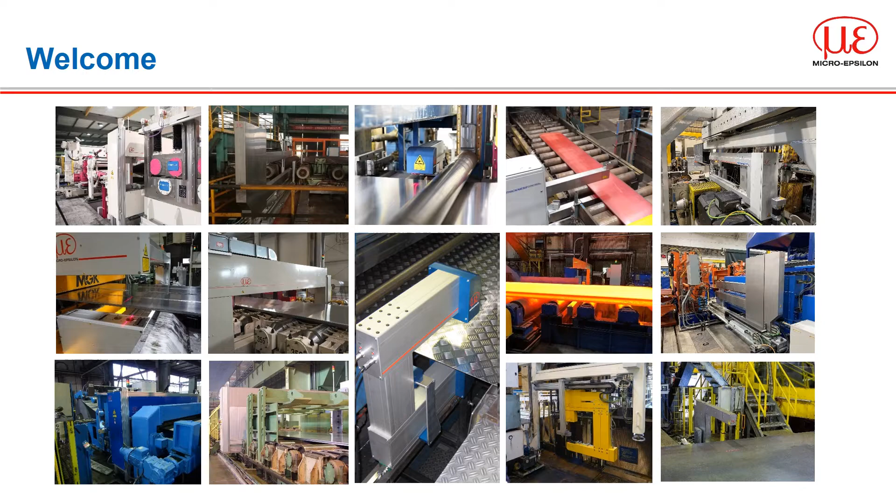My name is Glenn Wedgbrow, and I am the Business Development Manager for Micro-Epsilon here in the UK. I'll start by giving a short introduction to the company Micro-Epsilon, before posing the question: why measure thickness? And from that, we will explore the challenges to making reliable thickness measurement.

I mean, thickness measurement is easy, right? What could possibly go wrong? I'll follow up the challenges posed with solutions and applications and show you where our systems have been used.

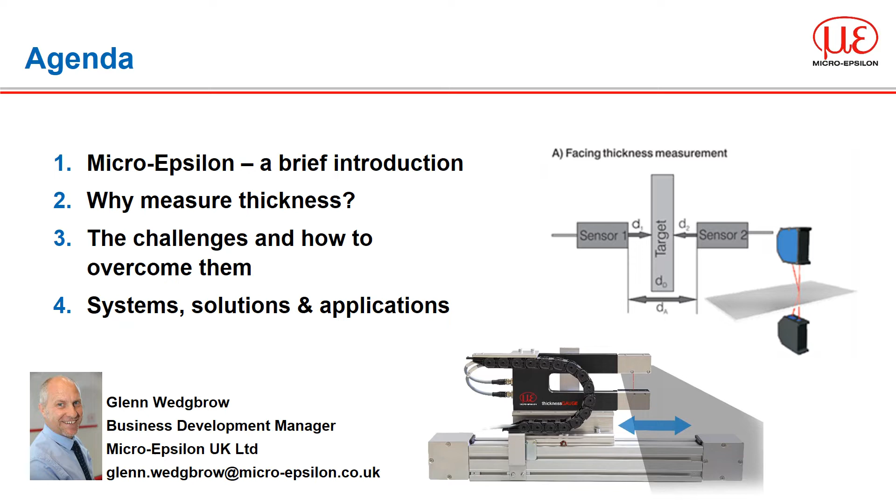So who or what is Micro-Epsilon? For the benefit of those watching for the first time, Micro-Epsilon are a German company established in 1968, originally selling American high-precision strain gauges, which is actually where the name Micro-Epsilon comes from. Around 1980, we developed our first eddy current sensing technology and then moved away from selling strain gauges and started to develop our products for displacement measurement.

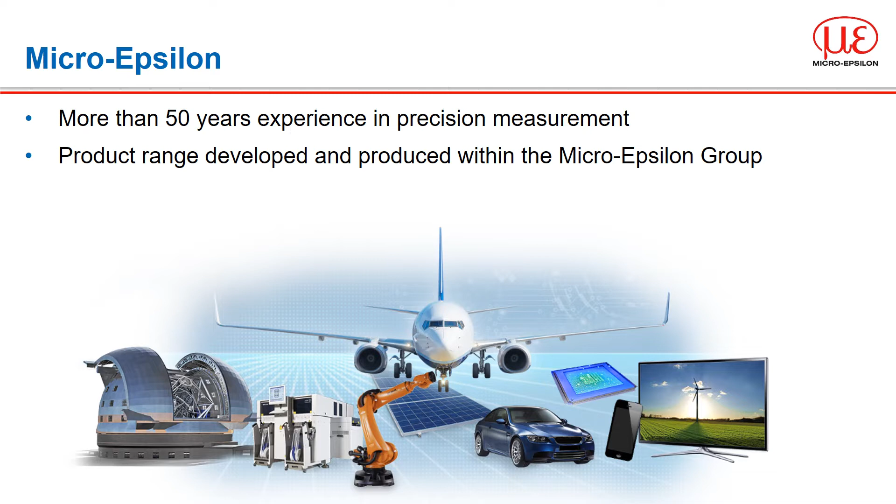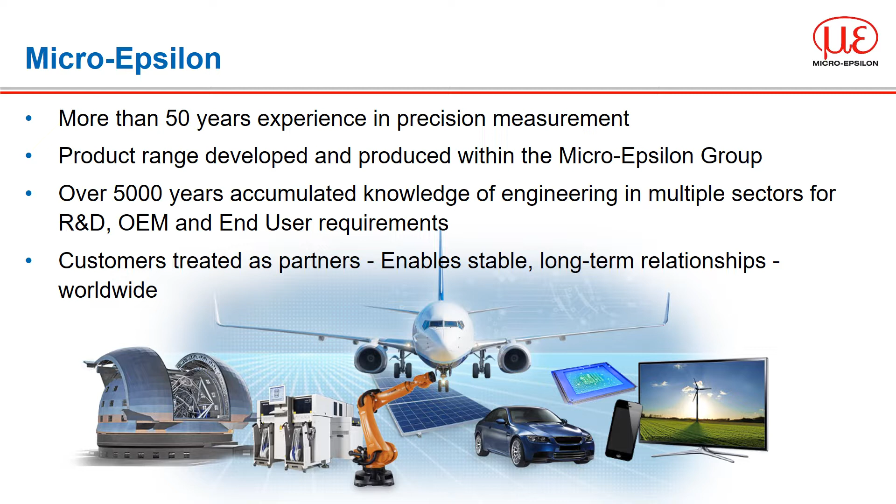From just 2 people, the company has grown to over 1,200 employees worldwide. The entire product range is developed and manufactured within the Micro-Epsilon group of companies, of which Micro-Epsilon UK is one. The organisation has been built by engineers, and combined we have more than 5,000 years of collective technical knowledge across multiple industrial sectors. One of the keys to our success is that we treat our customers as partners, working with them to ensure stable, long-term relationships worldwide.

Our current product offering falls into 3 basic categories: measurement of displacement, measurement of temperature, and inspection and measurement of colour. Across these 3 fields, we've developed and utilised technologies that allow us to measure positional changes from as small as 30 picometers and distances up to 3 kilometers. With our infrared temperature sensors, we can measure from -50 degrees C to +3000 degrees C, and for colour, we can detect changes or shades much finer than a normal human being.

We're able to offer products as catalogue one-offs to fully customised solutions in hundreds or thousands of units. Indeed, our production capability is more than 1 million products a year.

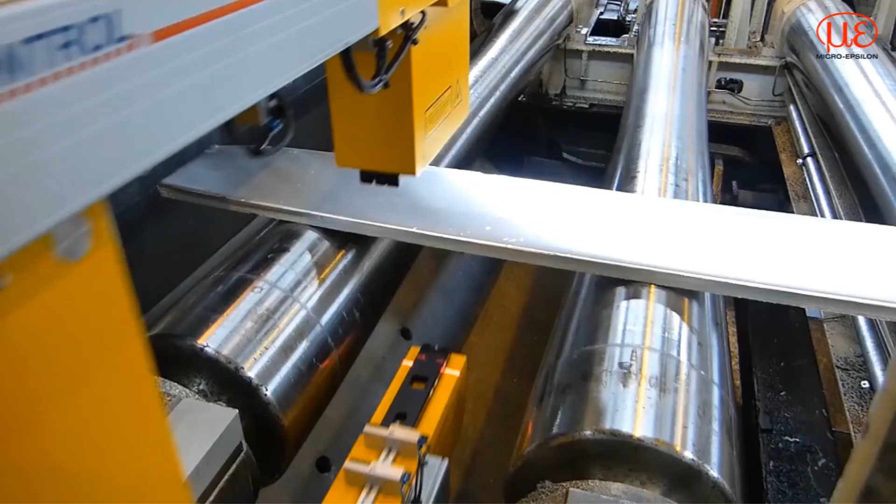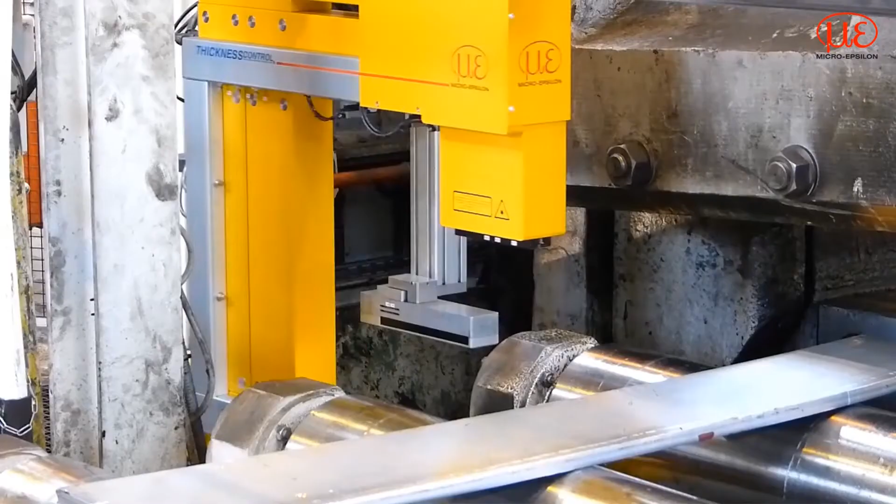So why do we want to measure thickness? There are many reasons that thickness is important. All materials have a tolerance in production. Materials produced too thin or too thick could cause a problem further down the line, or perhaps at your end customer's site. Maybe they use this material and build it into a system that then fails or doesn't fit.

Changes in thickness during production can indicate wear of components, for example in extrusion dies or on rolling stands. Monitoring trends can point to early warning signs.

The traditional method of checking thickness is often to take a measurement sample from the start of the production run and then again at the end. But what happened in the middle? Of course, if you find it out of tolerance, that's a lot of scrap to consider. So you might choose to take more readings during the process.

If that check is done manually, then that often requires the production line to stop. And anyone will tell you that most process variability will come in the start and stop phases. So keeping a line running is generally key to getting things consistent. Ultimately, checking the product thickness as it is produced ensures that the end customer receives the quality of product expected.

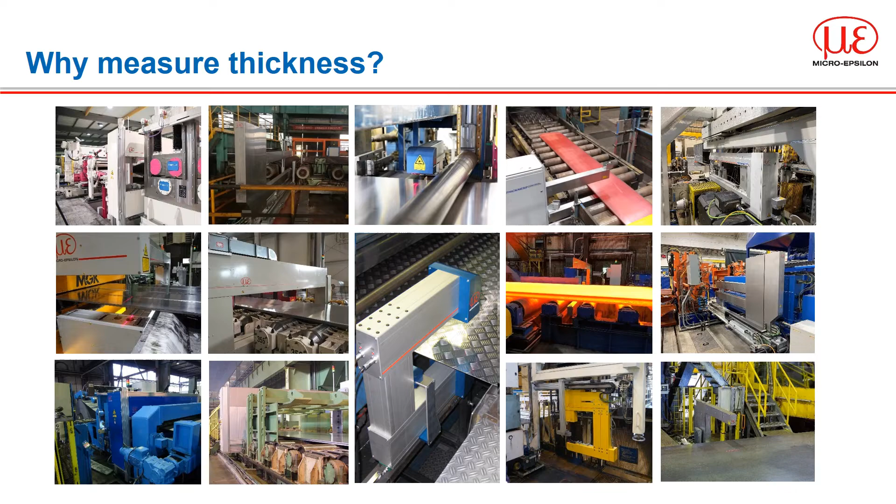Perhaps the most simplest thickness measurement is the single-sided measurement against a reference or datum surface. It seems straightforward. First, you zero or tare the sensor on the datum surface, and then insert the target to be measured. The reading of the sensor is changed or displaced by the material thickness.

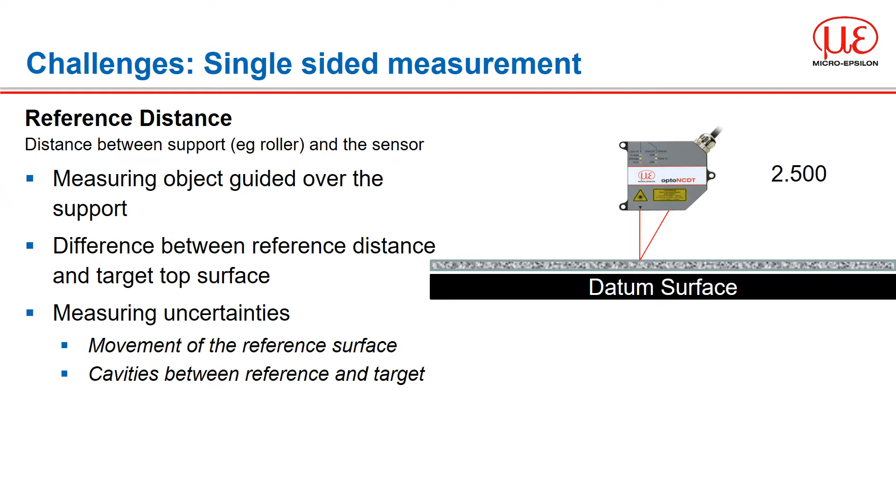However, there are a number of uncertainties with this method. If the reference or datum moves after mastering, then the reading will be incorrect. Similarly, if the target does not sit correctly on the datum surface, then the air gap is also included in the measurement. The same issue can also occur with tilted targets.

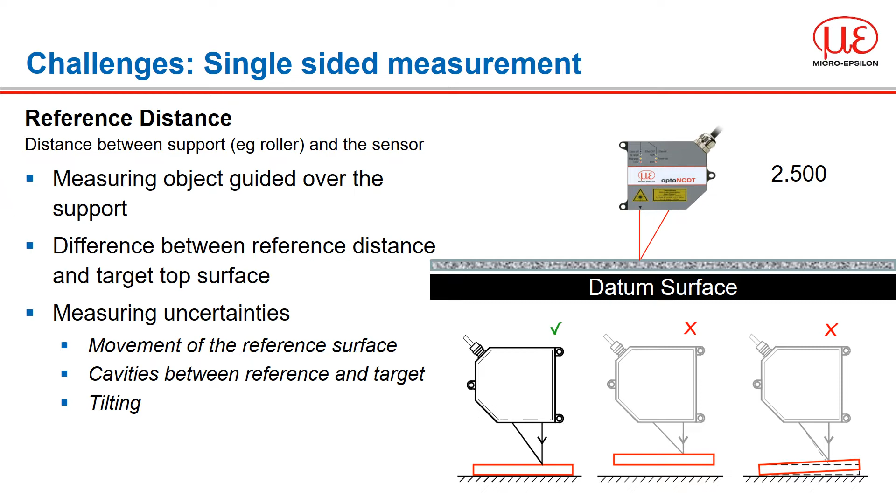If we are only allowed to view a target from one side, then we have to consider if we can combine technologies to enable accurate measurements. Where we have a mix of different material types, we can utilize those different material properties to our advantage.

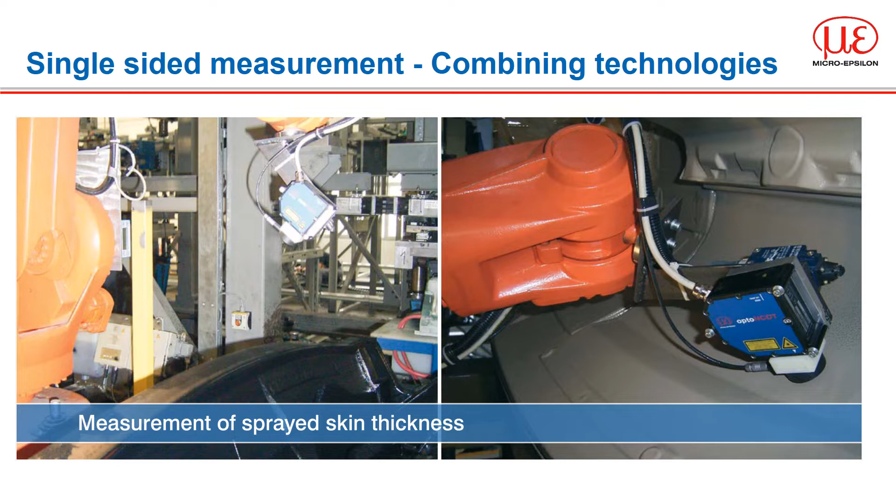For example, an eddy current sensor in combination with one of our laser triangulation sensors is used to measure sprayed skin thickness. The eddy current sensor measures the distance to the nickel-coated spray mold, which is distance A, and has an opening in the center through which the laser sensor measures the distance to the sprayed part, distance B.

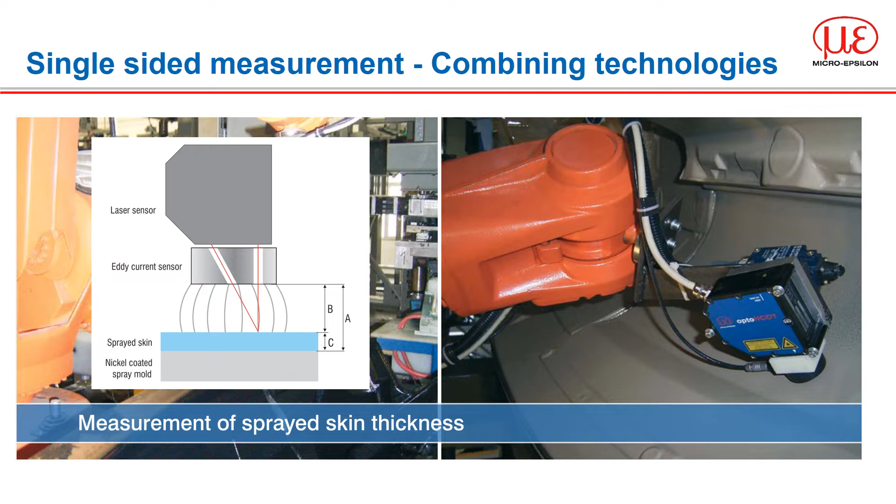Eddy current sensors only measure against metallic targets, and therefore see straight through the non-metallic spray coating. The use of the air coil in our eddy current sensors makes this combination possible, as the laser sensor can look through the eddy current sensor at the same measuring point. When both signals are subtracted, the thickness of the applied sprayed skin is measured, which is marked as C.

Or another well-used sensor combination is done with our eddy current and capacitive sensors for non-metallic materials passing over a roller. Movement of the metal roller is considered by the eddy current sensor, and the capacitive sensor measures the material or coating thickness.

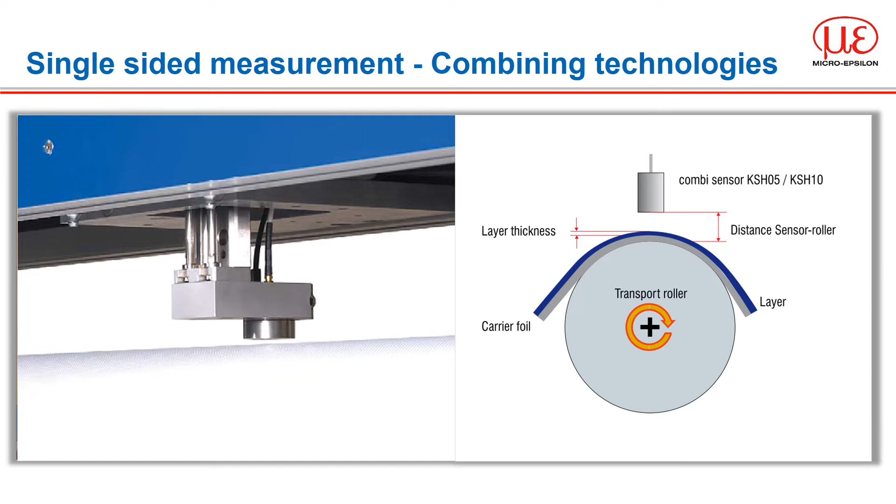If your target is transparent, you have the possibility to make a relative measurement of the material thickness from one side, using one sensor with interferometer or confocal technology. The use of light refraction creates edges or return signals that indicate the transition between air and material. Knowing the refractive index of a material will enable you to accurately measure the material thickness, provided it stays within the measurement range.

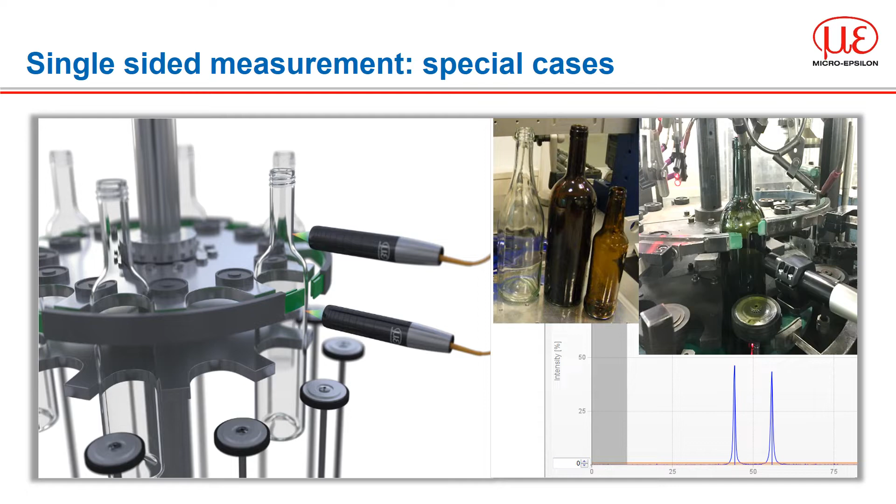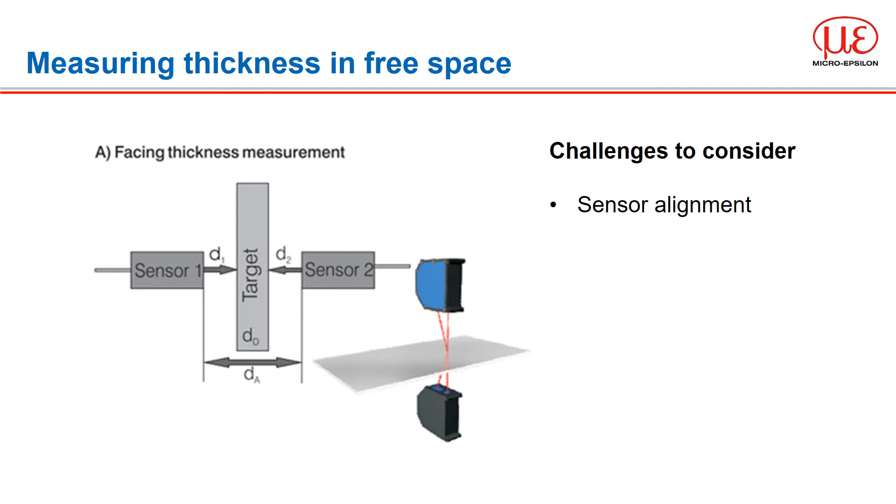Of course, if single-sided measurement is not suitable or the challenges cannot be overcome, customers will want to know the true material thickness by measuring the material in free space, which requires having space on both sides of the material so that a measurement can be taken from both surfaces. When you consider this setup, there are a number of challenges that must be considered and either overcome or accepted.

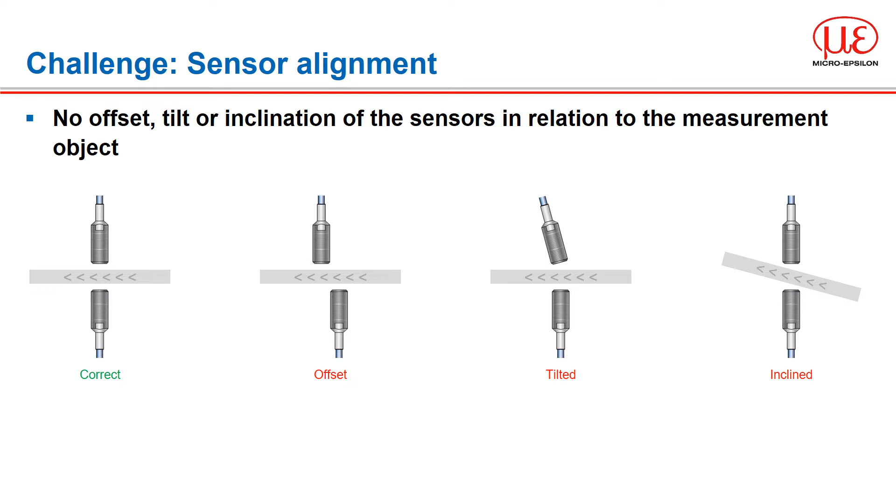The first challenge is sensor alignment. Seems fairly obvious - sensors must be positioned so that the measuring spots coincide through the full measuring range of the sensor. There should be no offset, tilt or inclination of the sensors in relation to the measurement object. For example, with a sensor offset of 1mm and inclination of 2 degrees, the effective error equals 35 micron. At 10mm target thickness, this error increases.

Particularly with laser triangulation sensors, you should also take note of the beam spot location relative to the sensor housing. You should not necessarily assume that two apparently identical sensors will position the spot in the same place. Standard sensor housings are not usually precise enough for precision thickness measurement unless time is taken to align them correctly. For example, here there is a 160 micron variation in position of the spot from housing to housing.

To aid customers making their own thickness setups, the new ILD 1900 laser triangulation sensor uses an innovative sleeve mounting arrangement to tighten the spot spacing from housing to housing. So here the spread is less than 20 micron from one sensor to another.

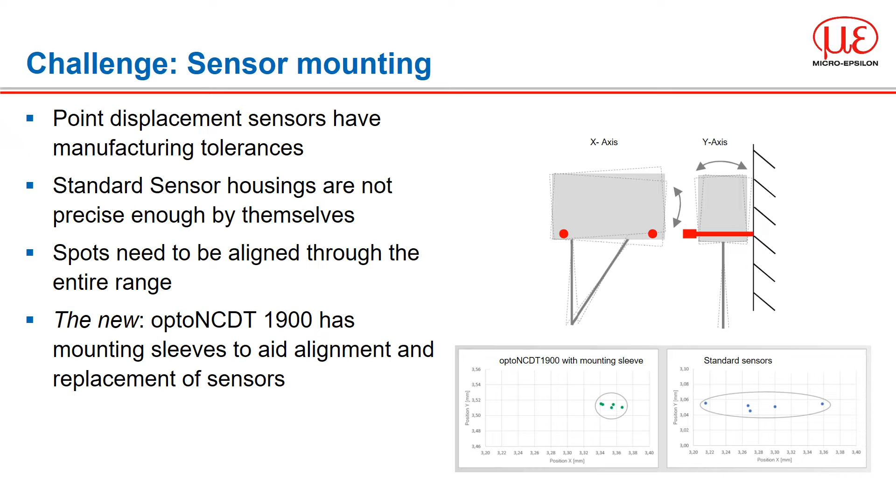When you have two sensors looking at the same target, you must consider that each sensor has its own cycle time. If your target is vibrating or moving in the gap between the sensors, it's very easy to introduce an error. Consider a target oscillating up and down by 1mm at 20Hz, 20 times a second. A difference in capture time of just 1 millisecond between your sensors would equate to an error of 125 micron.

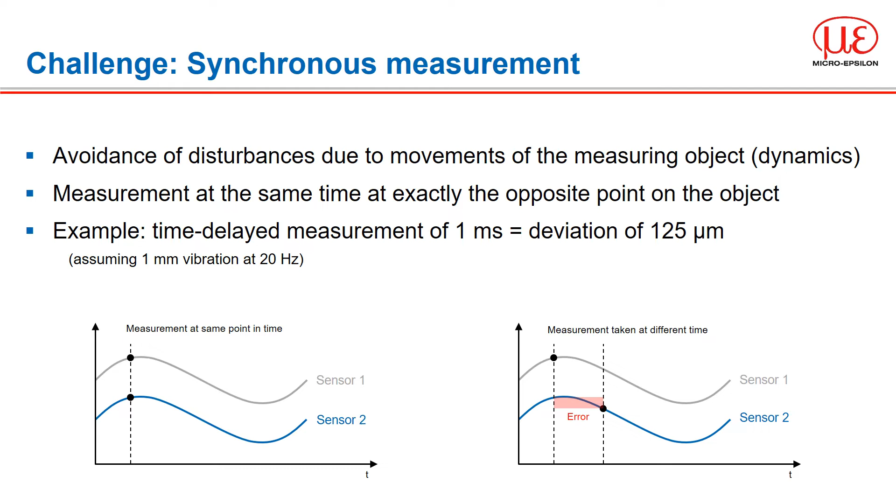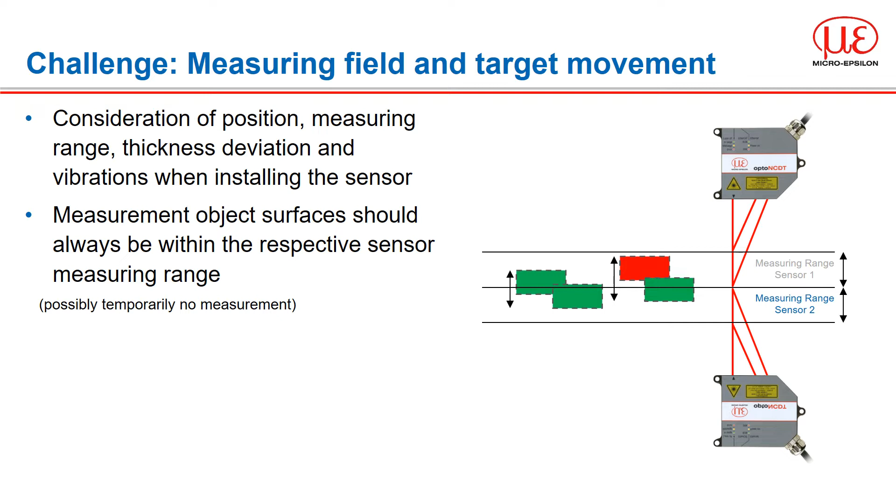Our next challenge is the relative position of the sensors and their measurement ranges. Depending on how the sensors are arranged, the position of the target edges must stay within the measuring field. If your sensors are set so that the measuring zones do not overlap, situations can arise where one sensor may not see the target, which is indicated by the red box, that is not seen by the lower sensor.

Additional consideration should be given to process start and stop conditions. Is the material held in tension at all times? Speed changes in the line can induce upward or downward movement. Is the setup able to capture these events if needed? Ideally, make sure sensor ranges overlap and cover the full range of material movement, or at least as much as possible.

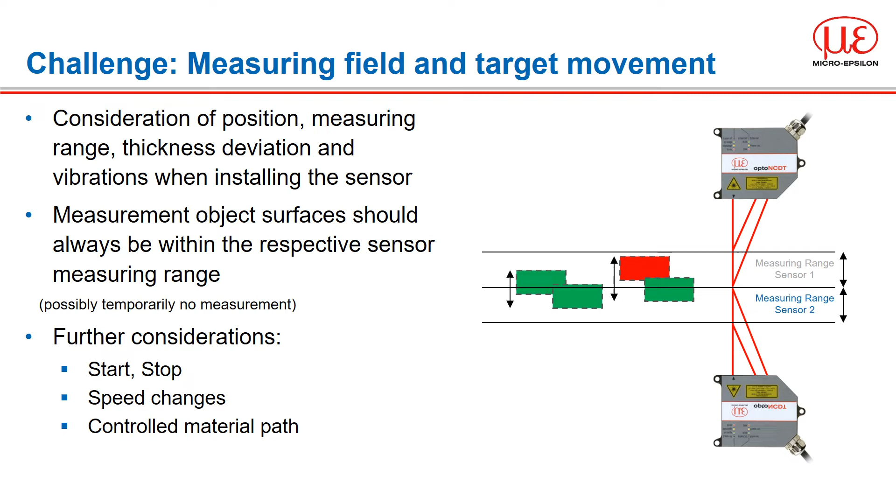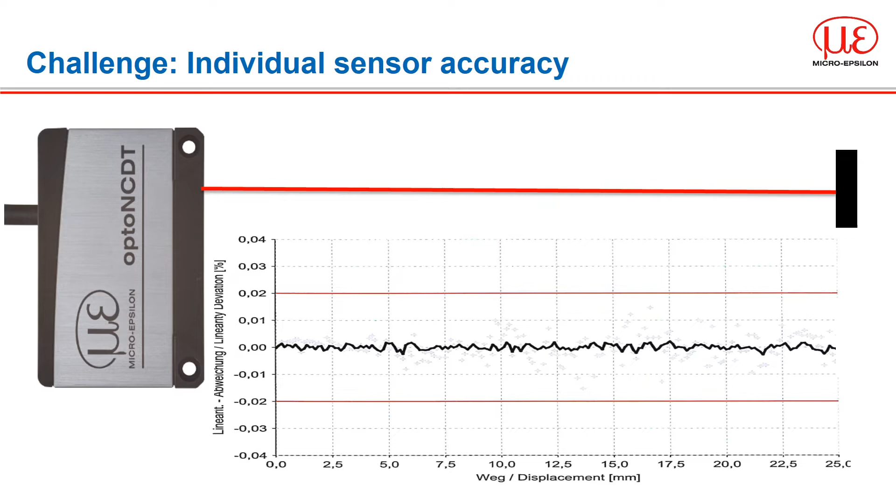The accuracy of a sensor is often referred to as its linearity. Each measurement sensor has its own measurement uncertainty or non-linearity. This means that at any given point in the measurement range, the actual reading from a sensor can vary by a percentage of its measurement range.

So taking just two sensors without any additional processing means you need to consider both sensors' uncertainties with respect to the accuracy you are looking to achieve. For example, without adjustment, just moving a target 200 micron up or down can result in errors of 8 micron. The position in the range also has potential to affect the true value. To get around this, you must calibrate.

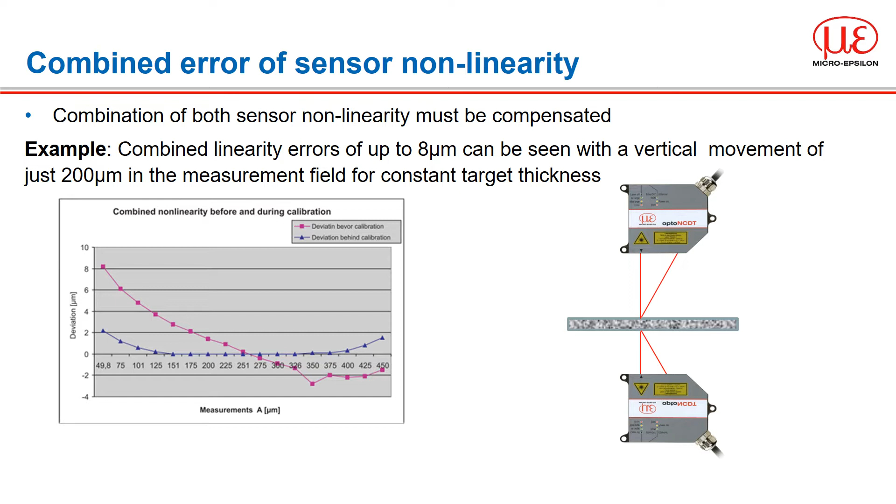Even when we have aligned the sensors, synchronized them, etc., there is still a further challenge that can affect everything: thermal changes. When measuring a target thickness in free space, the gap between the sensor and the opposite sensor is critical, as this is the constant on which the differential measurement is based. Taking a mechanical frame with a pair of sensors and cycling the temperature shows that the effective change with just a 5-degree swing is up to 20 micron.

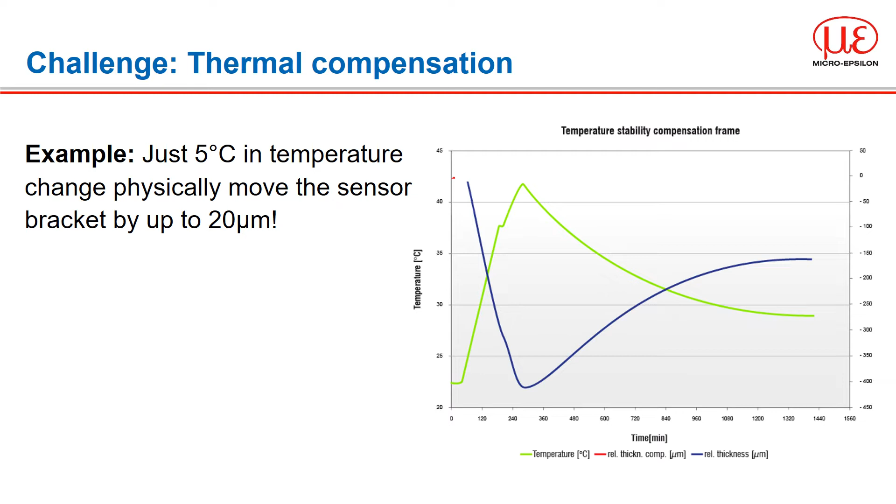Your final challenge, if you've overcome the previous ones or accepted the errors associated, is to prove the capability. Exactly how do you check or confirm the performance of your solution? There will be two factors to consider here: the system repeatability, how much variability in the measurement system is caused by the measurement device, and reproducibility, how much variability is caused by different conditions or operators.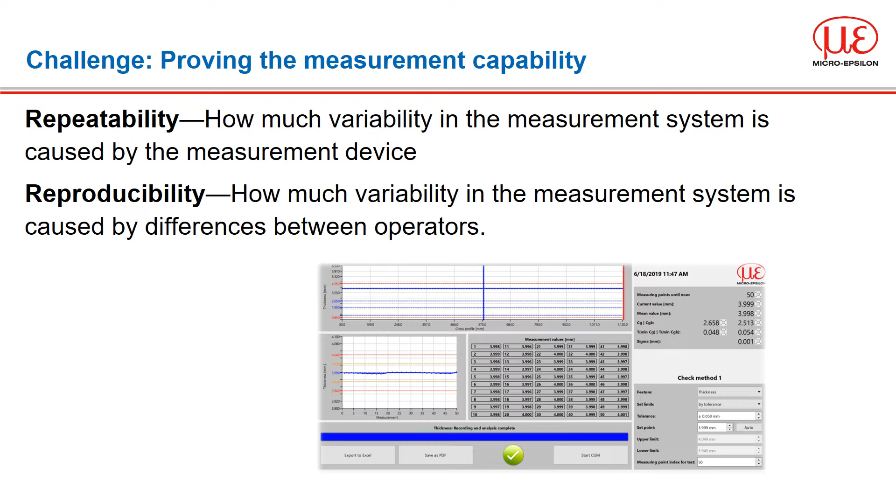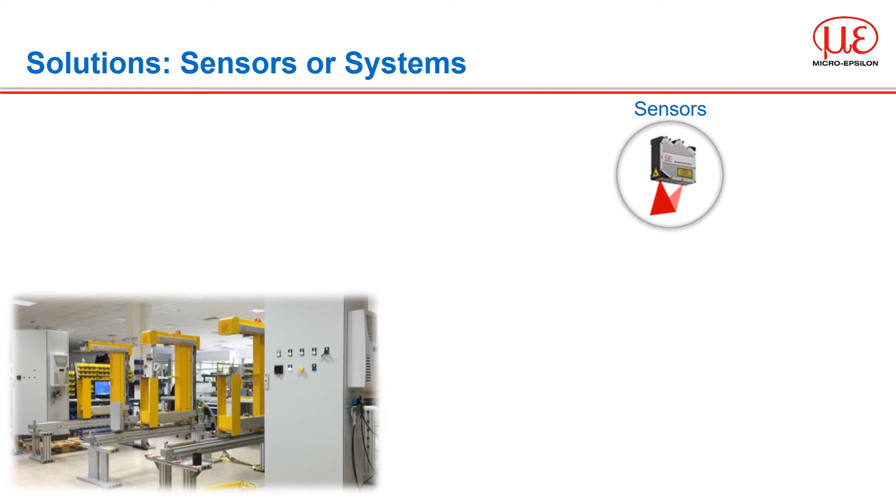So how can we look to overcome the challenges I have presented? Certainly we have to take each application on its own and assess the needs of the customer and consider the tolerances required and whether sensors alone are able to solve the task.

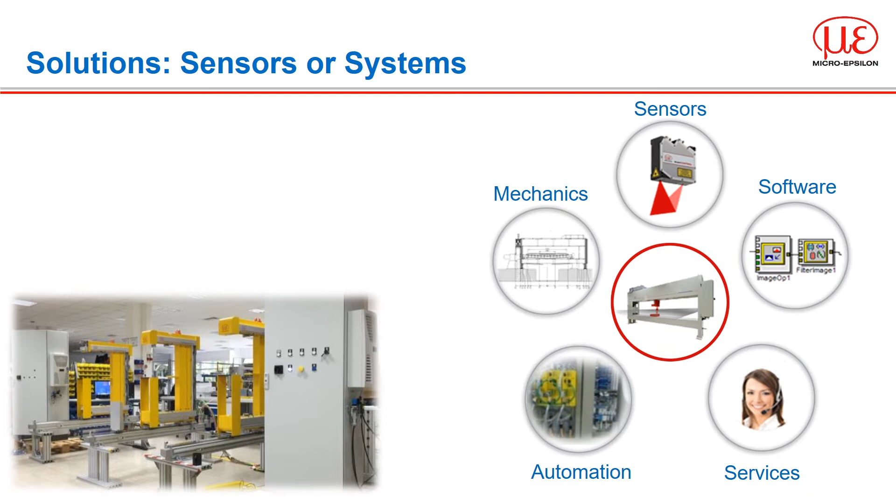So how do our systems solve the challenges discussed? Alignment and synchronization are taken care of when purchasing a system from Micro-Epsilon. Knowing the overall gap or distance between the two sensors allows the calculation of thickness to be made. To establish this value, we first need to calibrate the system. A certified gauge block is positioned in the measuring path. This known thickness, combined with the readings from our sensors above and below the target, equal the overall measurement gap, dA. Our systems will periodically return to the calibration position to check for changes and readjust values accordingly.

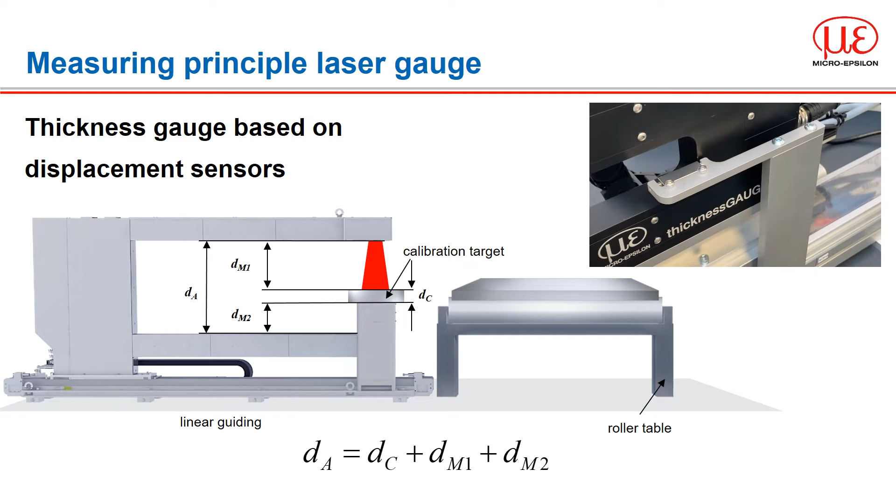Once the gap is confirmed and stored, the system can then be moved onto the target to be measured. The thickness of the material will now be the known gap, dA, minus the sum of the individual measurements from the upper and lower sensor.

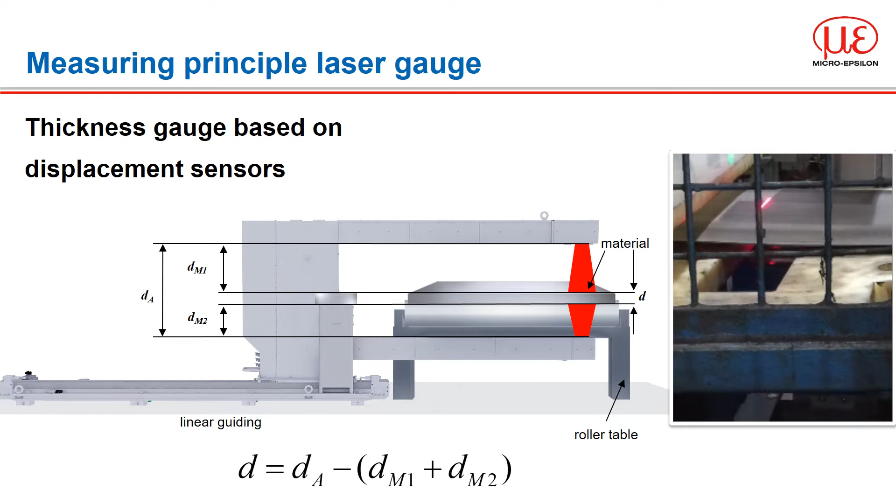A typical application is shown here with a traversing C-frame measuring strip metal thickness for crown, wedge and edge drop on a decoiling line prior to slitting. Calibration checks against the certified gauge block are performed at regular intervals to avoid inaccuracies that may be caused by changes in temperature.

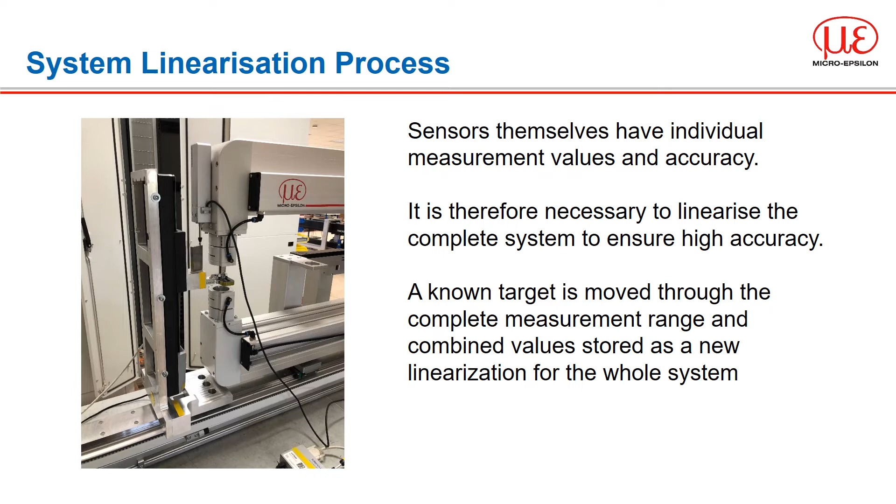I highlighted earlier that each individual sensor has its own measurement accuracy, and therefore, in order to get the best performance for the system, we need to understand the measurement behavior of the individual sensors and combine them. This is achieved in the systems department through use of a known target and highly precise reference gauge, which is moved through the measurement range.

The values of the sensors are recorded and the combined readings stored into a new linearization algorithm, which is used by the system software to calculate the true thickness reading. This is the extra step needed to achieve the total system accuracy, which is often better than the quoted individual sensor performance.

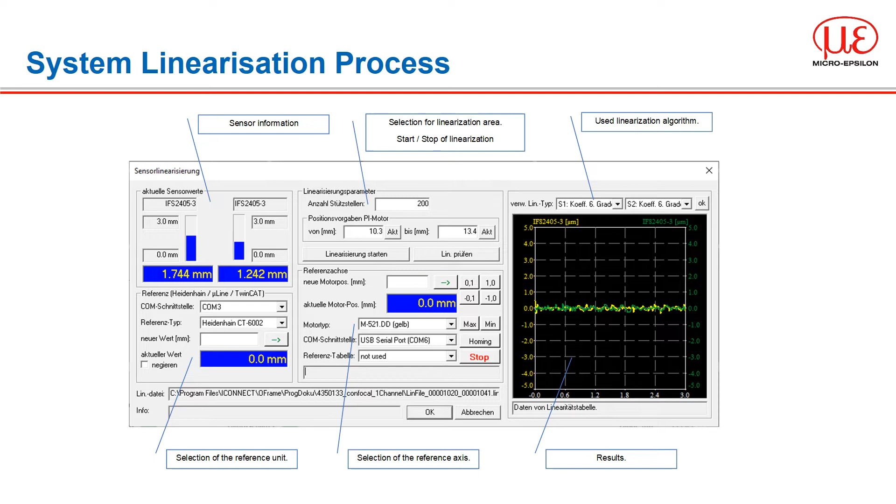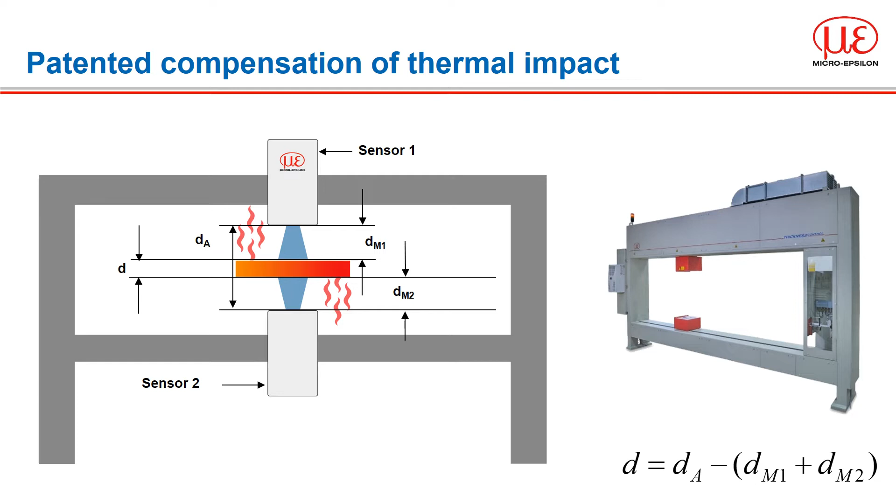Thermal compensation in an O-frame system works slightly differently. As we've already seen, the gap between the sensors is key to accurate thickness measurement. Even in an O-frame configuration, the mounting frame can expand and contract with temperature changes. Typically, the upper frame will move further than the lower frame. Heat rises, so the reference for the gap between the sensors can vary differently. The consequence being that the system reports a thickness change even though the real thickness has not changed.

Micro-Epsilon O-frame systems use a patented compensation frame made from an invar material and is designed so that thermal expansion of the frame is transferred in the horizontal direction rather than vertically. But this is only part of the solution. The second element is to then measure the gap change between the main frame, which holds the sensors, and this invar frame. This is achieved through using two Micro-Epsilon capacitive sensors, themselves extremely accurate.

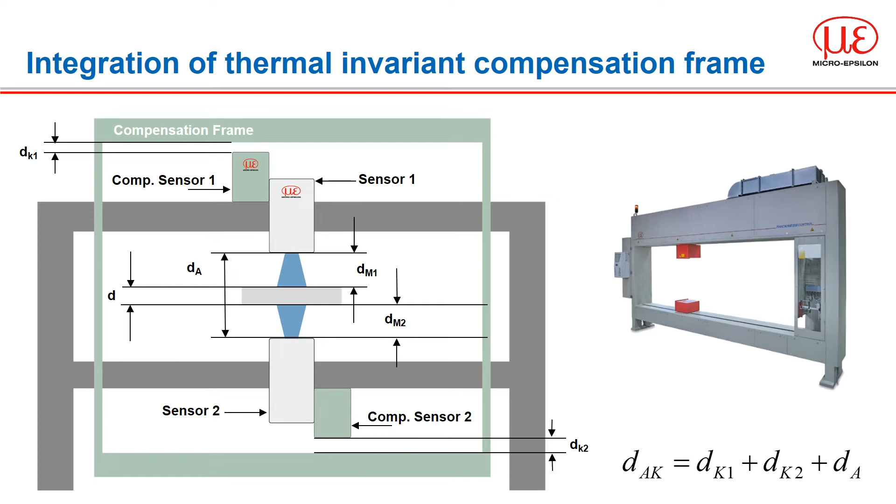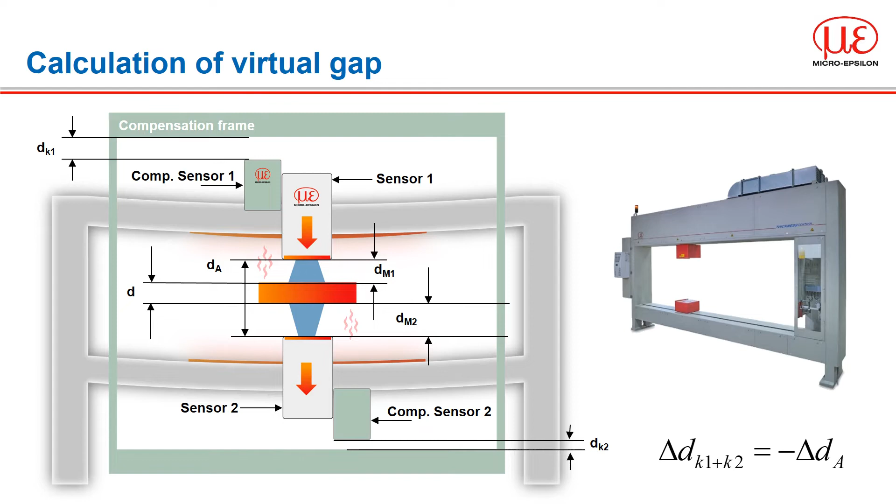Now, when the main frame expands or contracts, we can measure this change on the gap between both the top and bottom frame and compensate the effect into the thickness calculation. Even when the sensors are traversed across the full opening, the changing gap is continuously monitored and adjusted. As with the C-frame, we also have a certified gauge block included that can be positioned into the measurement zone.

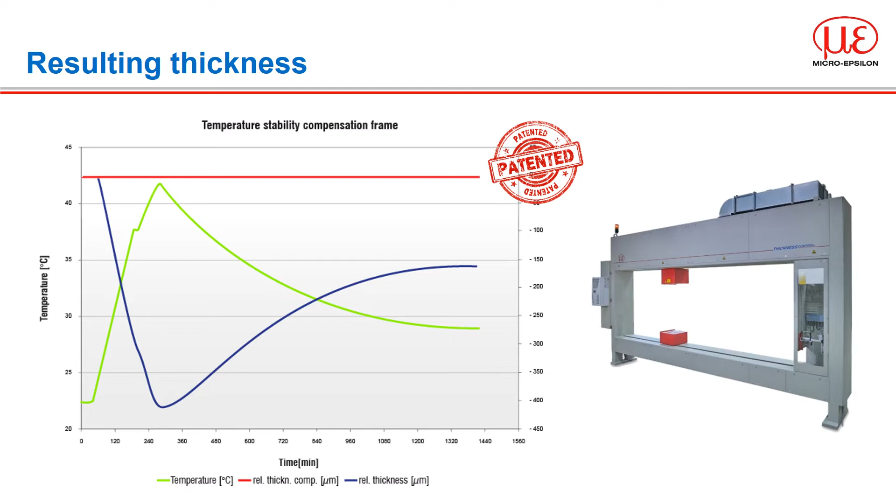As we saw earlier, the chart shows the effective temperature change with no compensation employed. A 20-degree change in temperature is perceived as almost 400 micron change in thickness. The red line on the graph shows the real effectiveness of the patented compensation frame, which exhibits stable results even with the adverse temperature changes.

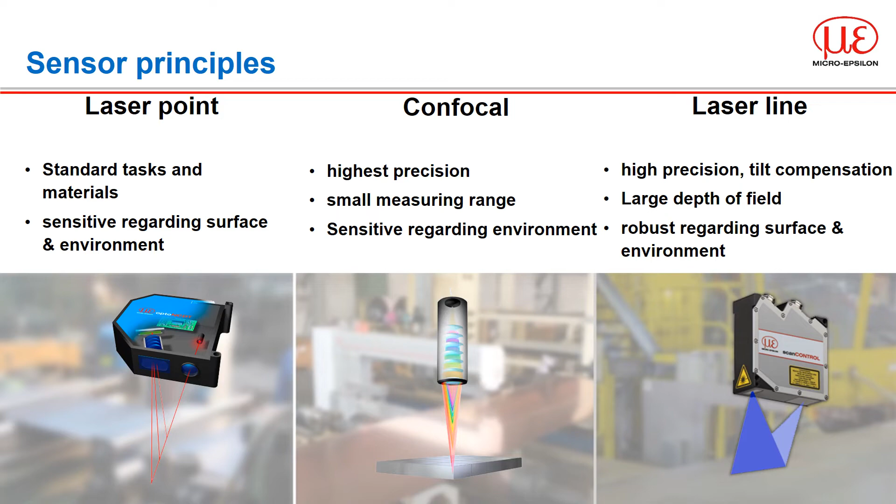Three optical sensor technologies are available for integration into the measurement systems. Single-point laser triangulation sensors offer a relatively low-cost entry into full thickness measurement capability. Confocal chromatic sensors provide the highest precision available, especially on shiny surfaces, whilst laser line technology is the most commonly used for its excellent combination of high precision and...

One of the main reasons for the use of laser line profile sensors is that we are able to make a best fit line of multiple points taken from the surface. Even if some points are missing due to surface oils or textures, the average reading is still good and valid.

The application shown here is for quality assurance in China. The plates are 4.6 meters wide. We measure thickness, profile and width. In addition, a laser Doppler sensor is used for calculation of length and can be used to tie the corresponding thickness values to that specific position on the strip.

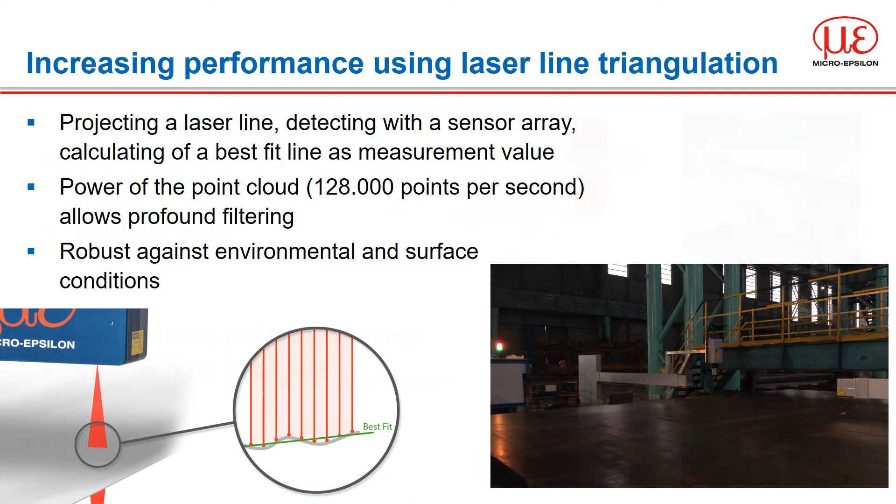Another consideration in the use of laser line sensors is that the laser line can compensate for tilts in the material. If single point measurement is used, significant errors can be introduced because the measurement is no longer taken perpendicular to the surface. The line sensor allows for detection of the angle of tilt and compensates to ensure the correct thickness value is measured. In addition, the laser line power or exposure time can also be adjusted to cope with oil films, emulsion and scale on the surface.

It also offers the ability to measure profiled surfaces for both minimum and maximum thicknesses, which can be helpful in understanding the performance and wear of an embossing roller, like on this checkered foot plate. A single point sensor.

The more traditional method of thickness measurement in the metals industry has been the use of isotopic or X-ray gauges, but these can have limitations when it comes to handling, ongoing support and operation. As we use optical measurement techniques, we're generally not restricted on the material type we can measure. Our measurements are made against a certified gauge block and we do not have to recalibrate for different material types.

Isotopic or X-ray systems need to know the material type being measured due to material property changes that influence the system's measurement behavior. As well as the fact that we have no radioactive substance to handle or control, there is no need for a safety area around the system other than normal guarding. The fact we are measuring against a known target for calibration allows the customer to perform their own capability checks at any time to verify system performance without influence from the supplier.

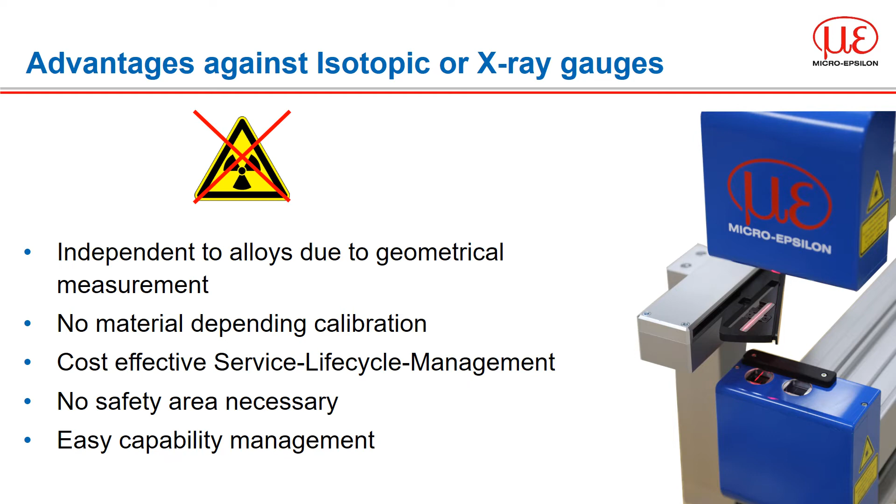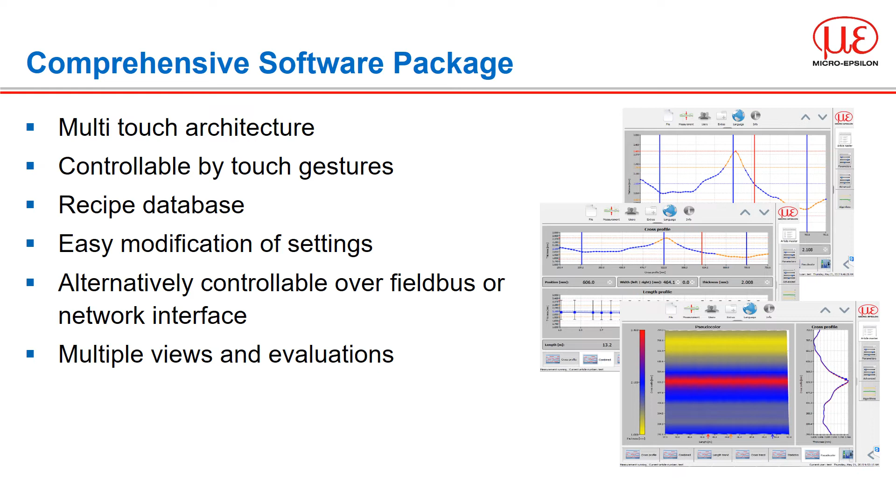Each measurement system from Micro-Epsilon comes with fully capable software for operation, data capture and analysis of the required measurements. The multi-touch functionality provides a familiar user experience similar to many smartphones and touchscreens in everyday use. The software also includes the means to check your system's capability at a touch of a button, performing both reproducibility and repeatability checks whenever required and without supervision from Micro-Epsilon.

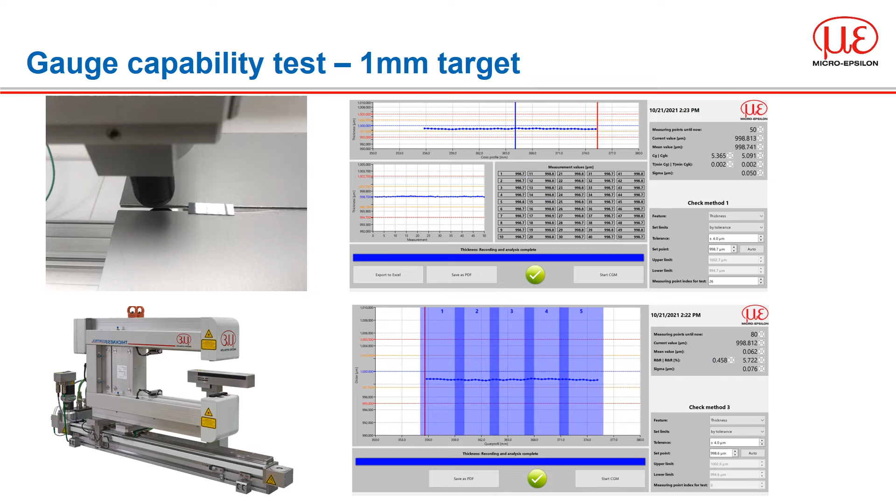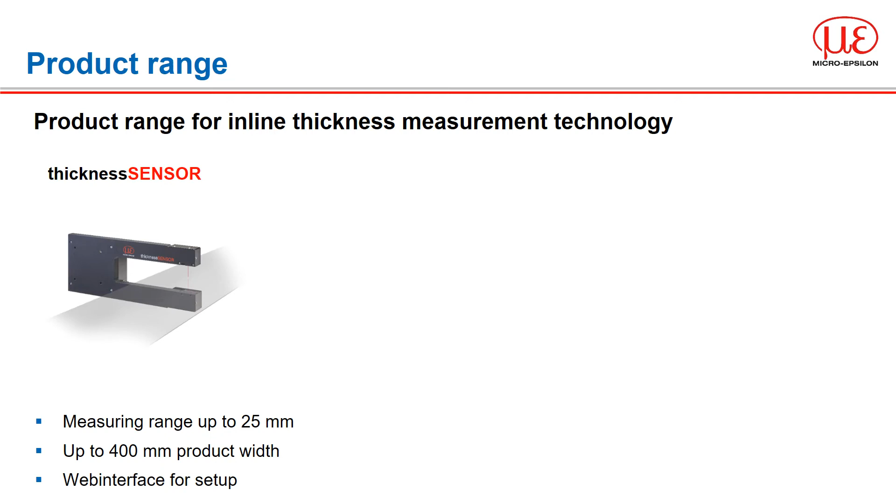If you want to measure thickness, we have three methodologies you can work with. Thickness sensor is a caliper-based solution with no traverse, just a reach of 200 or 400 millimeters with our single point laser triangulation sensors. No capability check, but it can be calibrated.

Thickness gauge is a fully turnkey system for light industrial environments with traversing up to 400 millimeters and includes the software for capture and control. Thickness control is the option for heavy industry and greater spans or widths.

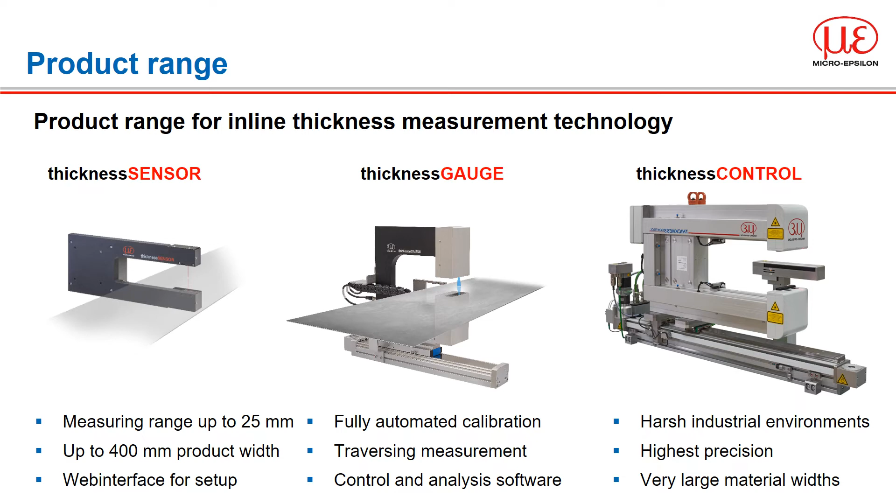We are supplying two different mechanical frames, O frame and C frame, which are further split into three series. Our entry-level systems are the new thickness gauge series for operation in non-critical ambient conditions, for example processes that typically run without elevated temperatures. The most common systems we sell are from the 8200 series for processing lines and cold applications, plus aluminium hot rolling, as the heat radiated from aluminium is minimal. Our high-end systems are the 9200 series for high temperature environments.

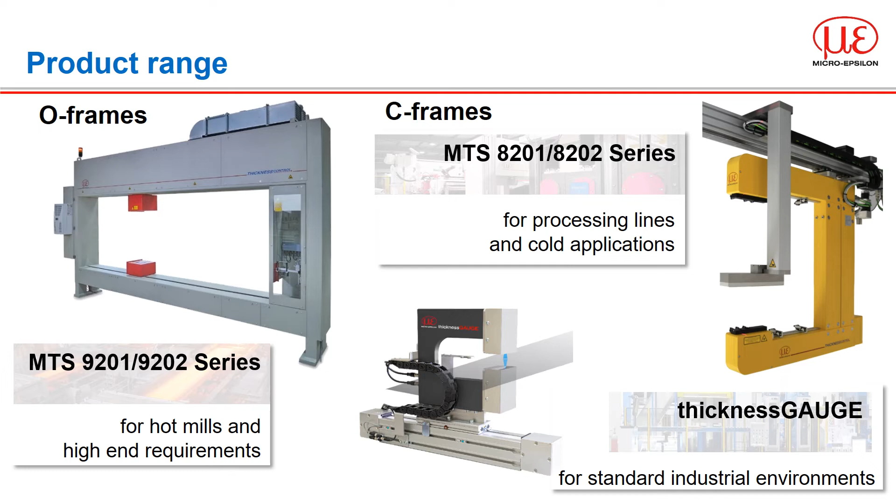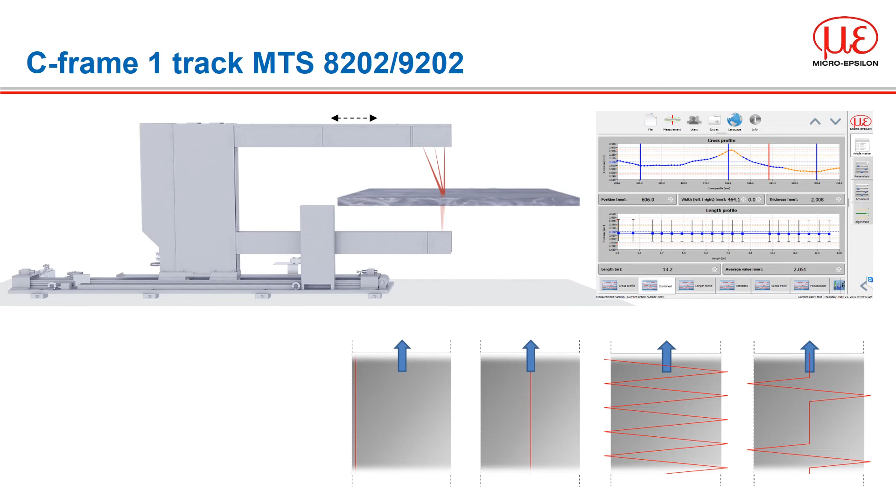Our C-frame systems are provided on traversing rails. With this they can measure at any position within its reach, or just the edge or centre as a fixed track. They can traverse back and forth across the whole width or make a combination of traverse, edge and centre line as required. Important to note is that the space needed beside the line is significant, especially for longer traversing systems.

O-frames are able to do centerline, traversing or mixed combinations similar to C-frames. However, because the measurement is contained within the system, the overall footprint of the O-frame is much smaller than that of the C-frame systems.

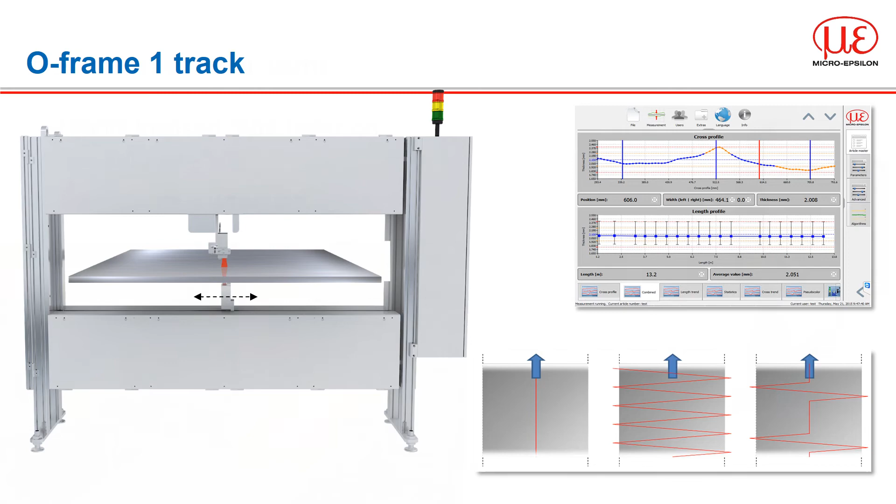In hot mills, apart from the obvious challenge of environment temperature, we must also consider the ability of the measurement technology to measure the surface. Pointing a red laser at a hot glowing surface will saturate the sensor receiver, effectively blinding it and stopping it from being able to measure.

However, this can be overcome by using a shorter wavelength sensor. Micro-Epsilon holds a patent for use of blue lasers to measure on hot glowing surfaces. Using the 405 nanometer wavelength allows readings to be taken on glowing surfaces with temperatures up to 1600 degrees C. The introduction of this technology opens the market for thickness measurements in hot mills.

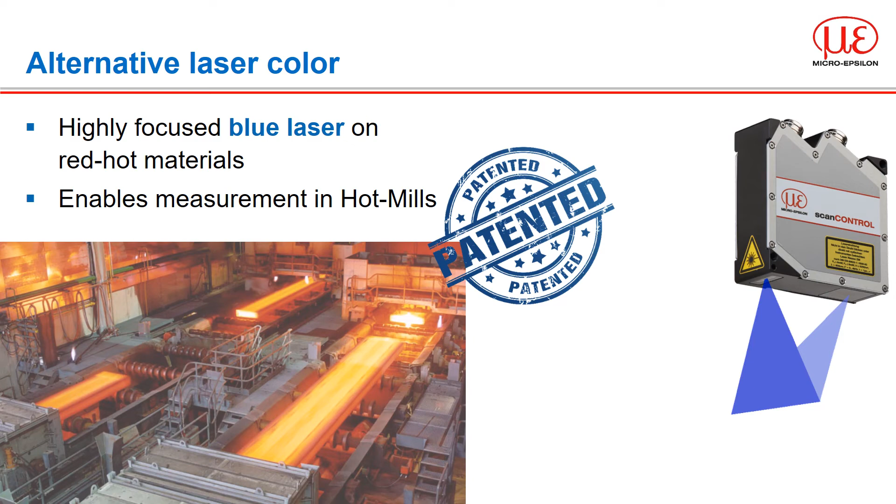So we have the sensor technology capable of measuring the target, but how do we protect it from the harsh environment? The solution is a C-frame within a C-frame.

A heat exchanger is controlled by a chiller with water flowing through it. Fans blow cool air through the inner frame and over the sensor, then return through the outer frame back to the heat exchanger. This flow ensures the sensors and traversing unit are kept within permitted operating temperatures and can be used to measure plates with temperatures up to 1200 degrees C.

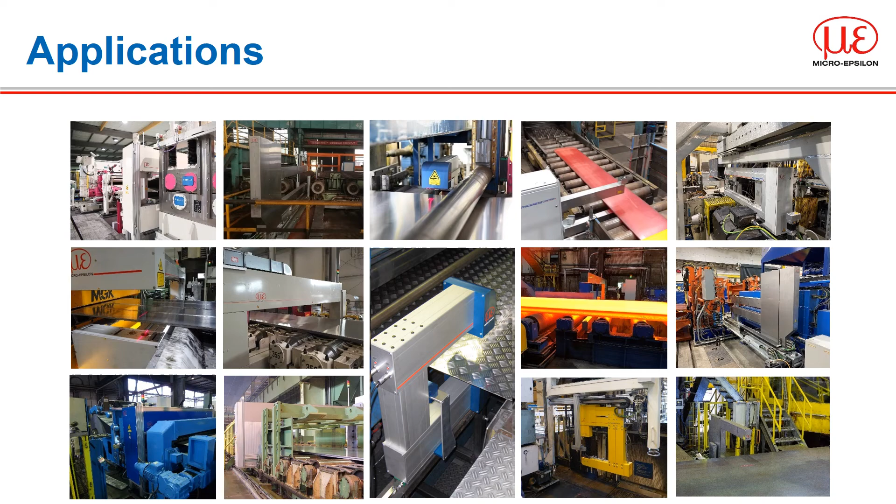So having seen the system technology, now let's take a look at some of the applications it has already been used in.

Our first application is for monitoring the calendered rubber in a UK production facility. This O-frame system is used to monitor the profile of the rubber as various components and layers are brought together before being formed into the final product.

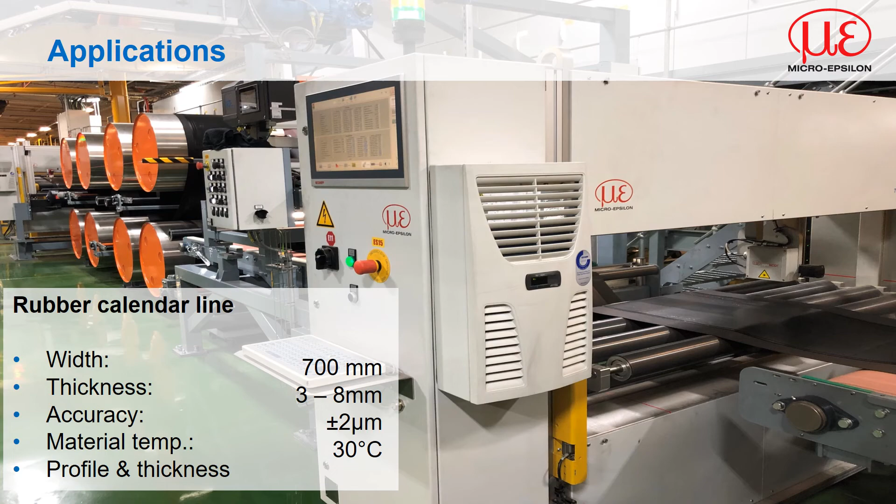Here we have a single-sided scenario measuring rubber on a roller. There is a combination of the laser point sensor and eddy current sensor to provide reference to the roller position.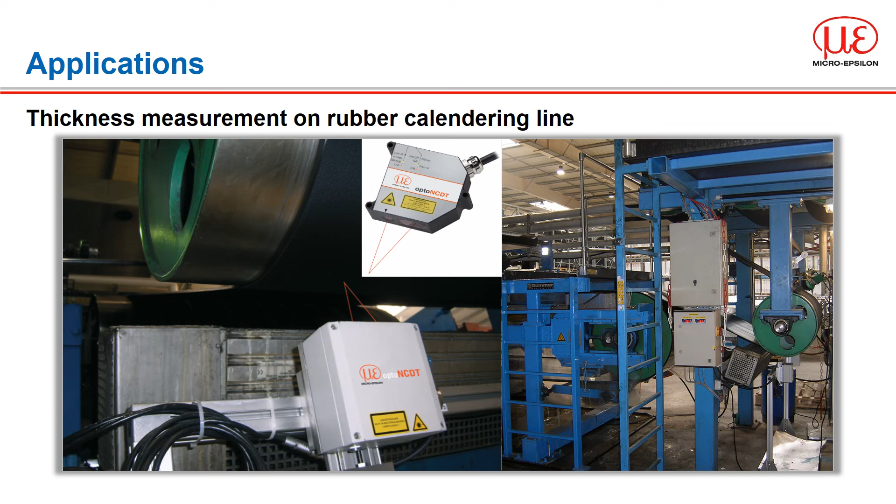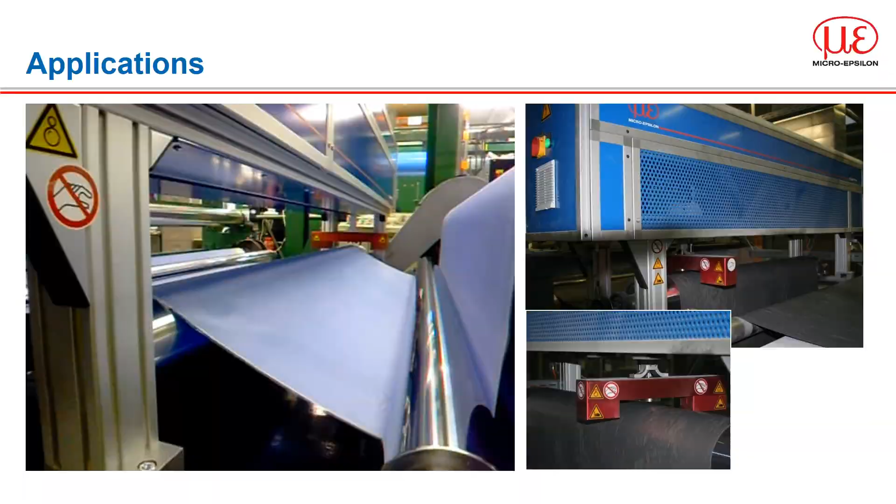Another UK application utilizes a combination method for thinner materials passing over a roller, whereby a through-beam micrometer and eddy current sensor system combine to measure the material thickness.

For this application, we're using C-frames to traverse across the coated metal. There are actually two systems utilized here, where we measure the base material before coating and then the overall thickness after coating. A subtraction of the before and after gives the painted coating thickness.

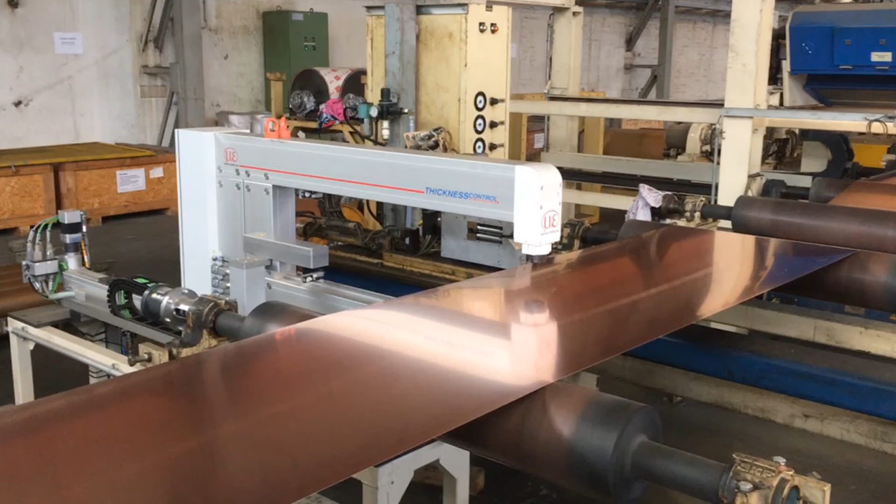Here we see the confocal C-frame measuring a copper strip. Note how shiny and reflective the surface is. This is no problem for the measurement with confocal technology.

For this customer, the copper is used for electrical cabling, and the key parameter is the frequency of the thickness deviation along the center line of the material. We use a fast Fourier transform in the controller to output the desired value to the customer.

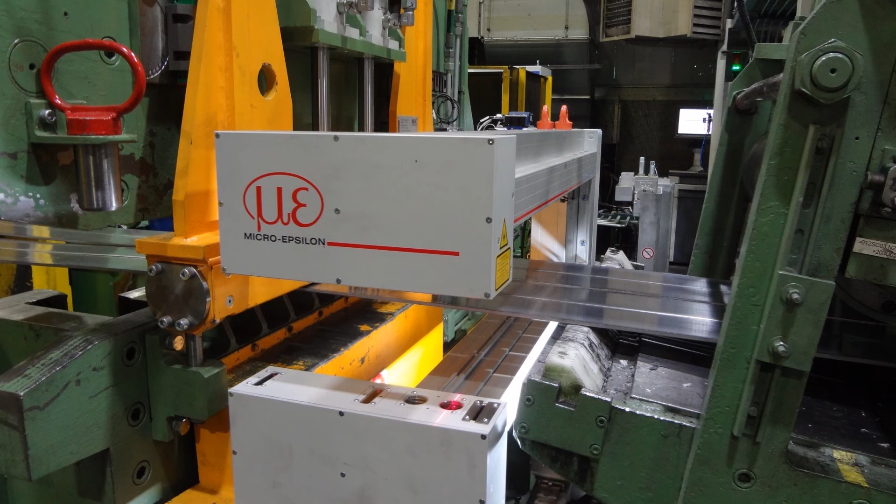Here we have a customized system installation which incorporates the main thickness sensors and, in addition, three of our optical micrometer systems which are utilized to measure the edge camber or straightness along the strip length.

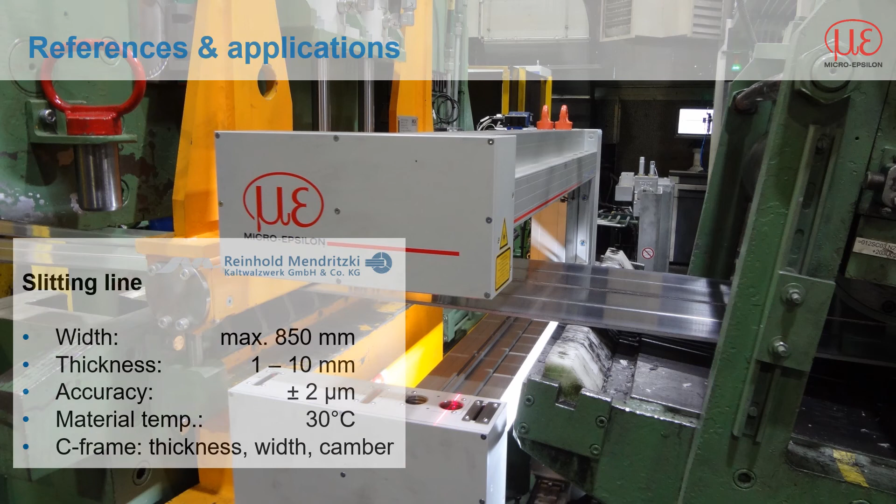For this measurement, the line is stopped, and after we measure the thickness profile, the optical micrometers measure the edge position of the strip at 3 places. It should be a 1 meter separation between the first and last micrometer, but to save space, the distance used is 0.5 meters, and the straightness is extrapolated from the known measurements between these 3 positions.

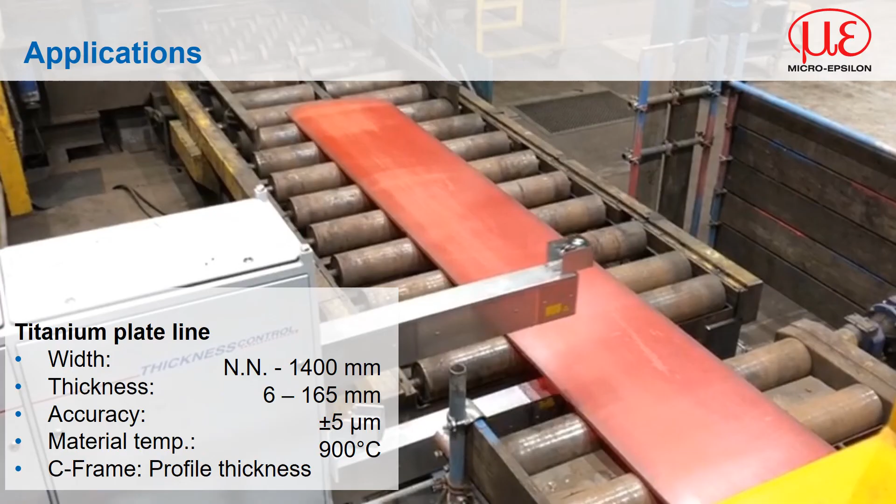Using our blue laser technology, this C-frame is equipped with a cooling system to keep both sensors and frame cool whilst the measurement is performed.

Here the material temperature is around 900 degrees C during measurement. Additionally, integrated into the system are infrared temperature sensors to provide product temperature in addition to the thickness profile.

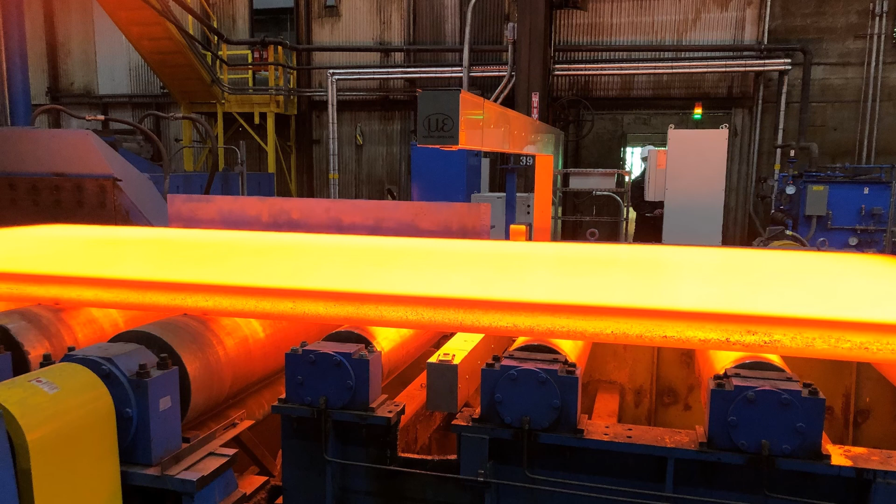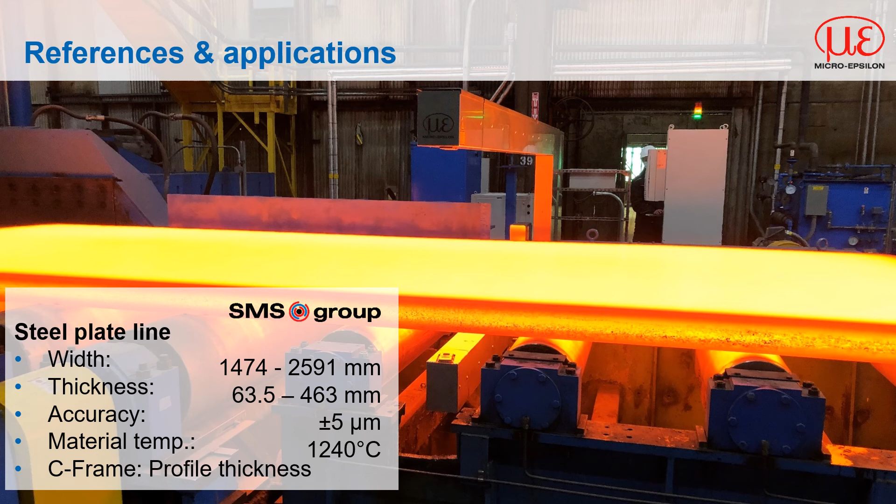This system is installed at SMS Group, which our system manager describes as the mother of all C-frames. In particular, we increase the gap to measure up to 460mm thick plates. This is something that simply cannot be done using X-ray or isotope systems.

Also, the environment is particularly challenging with plate temperatures up to 1240 degrees C. But in reality, the plates do not stay very long in the measurement gap, maybe 10 or 15 seconds, as the longer they sit stationary, the more the heat dissipates, and this can then affect the material properties.

One of the emerging markets currently is battery production. In this industry, the requirements for accuracy are amongst the very highest, with requirements for system performance to less than 1 micron. Overcoming the challenges and taking care of the complete system allows us to meet and exceed the expectations of this industry.

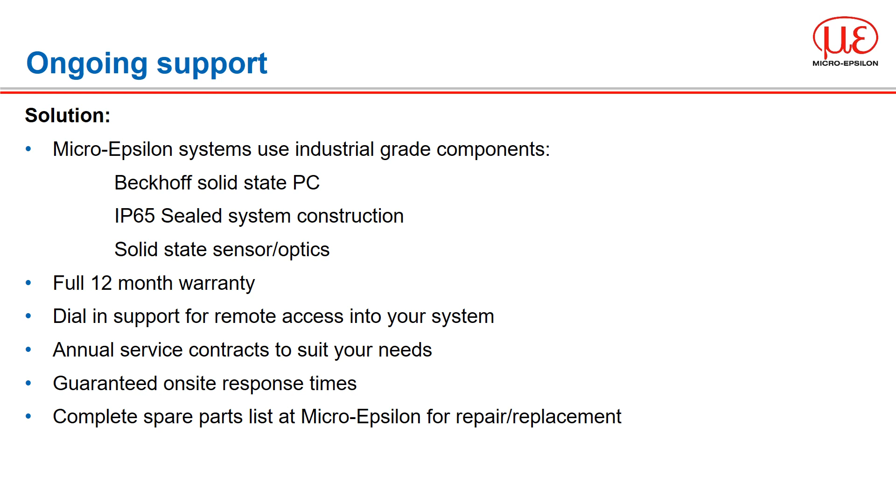Also available for the systems portfolio is a comprehensive support package which can be tailored to each customer's requirements and ensures longevity and availability of the systems.

As already mentioned, we have over 500 system installations around the world. Here are just a few of our satisfied customers.

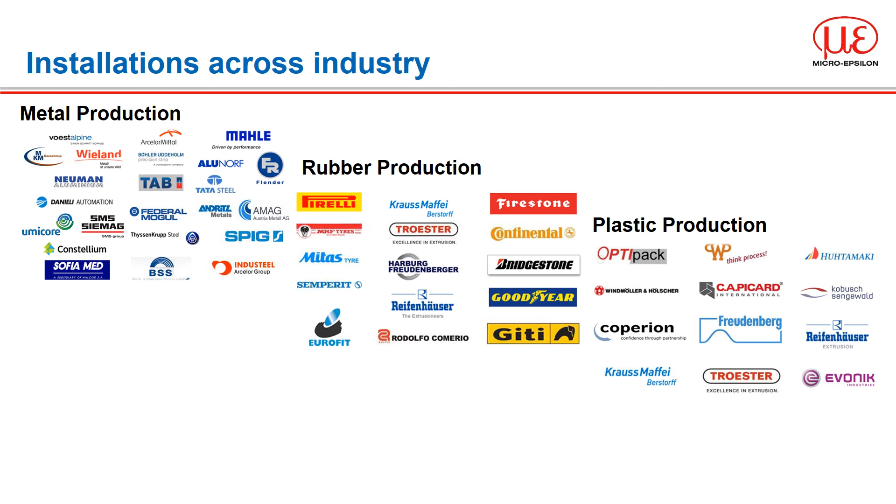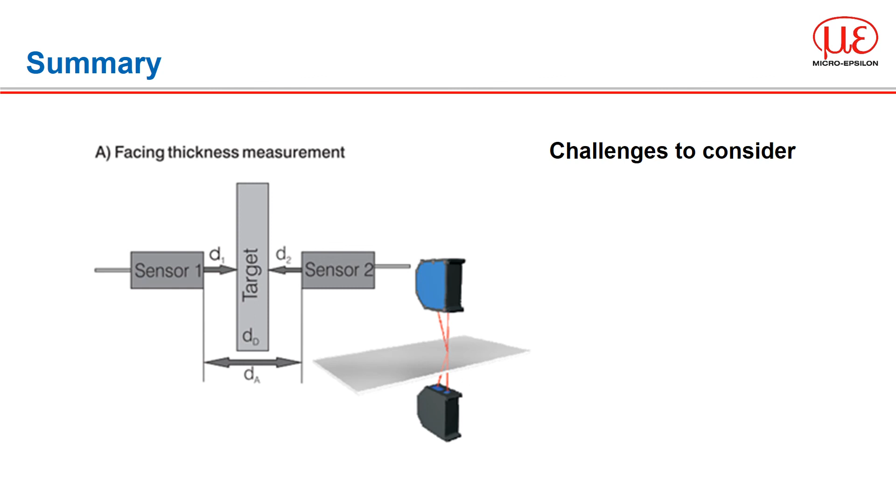So, through this seminar, we've considered and shown our solutions or recommendations for solving these challenges to thickness measurement. If you have a thickness measurement challenge, then we at Micro-Epsilon have sensors and systems that can surely help you.